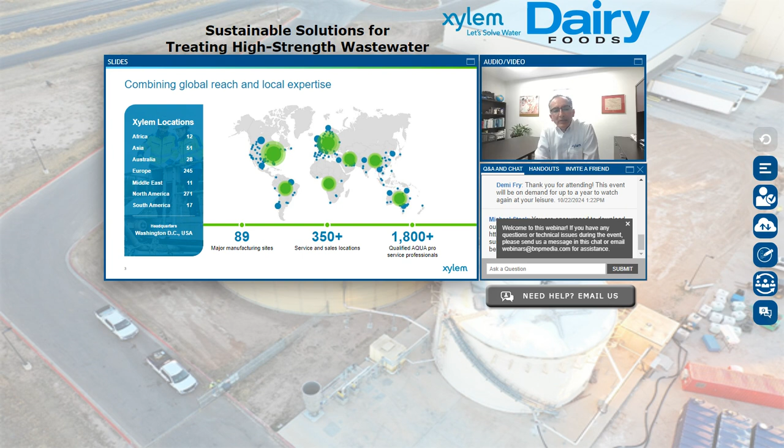As Brian was saying, I'm part of the ADI Systems team, and together with Evoqua Water Technologies, we joined the larger Xylem team about a year and a half ago. Xylem is a worldwide player in the water sector, with coverage worldwide, as you can see with the dots on the map. My work over the years has involved a lot of treatment systems in North America, but it has also taken me to international projects. Wherever there is industrial wastewater that needs to be treated, I'd be happy to look at it, and sometimes I get to go to some interesting countries and sites.

I am proud to say that Xylem places a lot of importance on sustainability, and sustainability has been a big part of what I have done over my career, getting close to 30 years now, but who's counting. Our sustainability involves not just doing our own work more sustainably, but also helping our customers achieve their sustainability objectives.

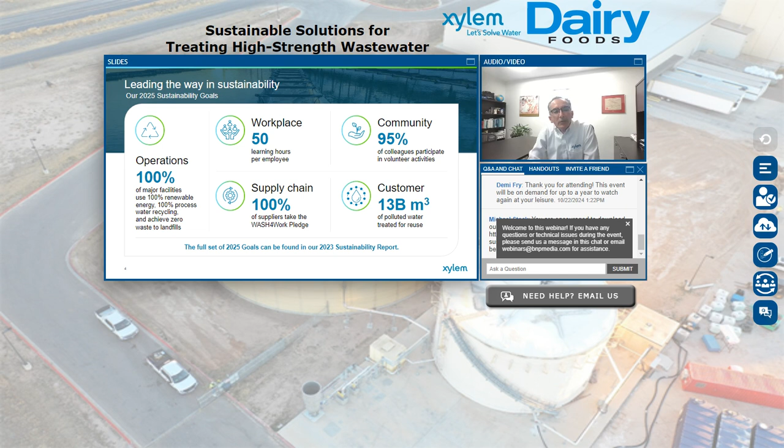But there will always be some waste material. From a sustainability point of view, how do you recover that value, or how do you reduce your waste? And of course, how do you improve your sustainability score out of your overall production process?

So, as you know, there's growing demand for dairy products. We're talking about an industry that could be in the 600 or 650 billion dollars per year worldwide. That has to do with demand for milk and milk products, and also a growing population and increasing urbanization. People are always demanding better and better products and better nutrition.

So the dairy industry has responded in kind, and we're seeing a trend towards larger production plants. And of course, as you do that, you're always having to look at how do you create those products in the most sustainable way possible.

Okay, so what does the wastewater look like coming out of a dairy plant? What is in that wastewater? As you know, milk comes into the plant, and you're either making fluid milk, you're bottling that milk, but you're cleaning the equipment that you use to do that bottling.

But as you get into more of a value-added product, whether it's cheese or yogurt, ice cream, or butter, you will be handling that product that came in, doing something to it, and then trying to get as much of that original milk that came into the plant into a final product. There will always be some losses, and those will end up in your wastewater. In some cases, there will also be bottling and packaging losses as well.

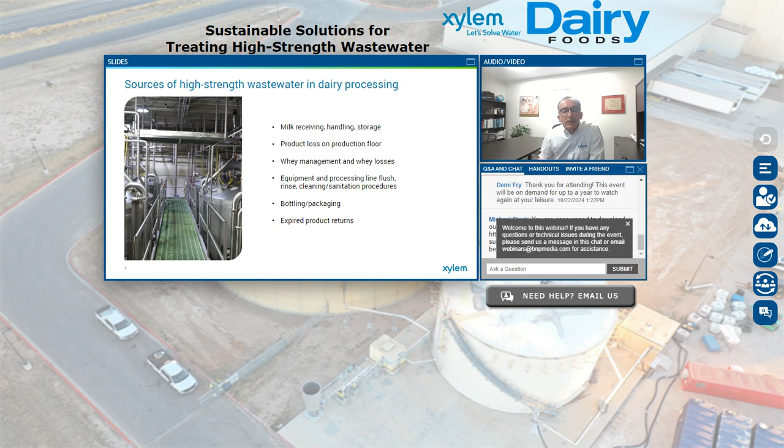Of course, where we come in is when some of those products can no longer be recovered directly for their value. What we're going to try to do is get some value out of the energy that's still left over in that product.

Okay, so this is a typical range of wastewater characteristics that you will see in dairy processing. I would say that this range would be more typical of a cheese processing plant, for example, or a yogurt processing plant. Most medium to large size plants would generate wastewater flows in the 50,000 to 500,000 gallons per day. Or if you prefer metric units, it would be 200 to 2,000 cubic meters per day.

And it's a fairly high organic strength wastewater. So if you're thinking of COD, chemical oxygen demand, if that's the term that you're familiar with, the concentration in COD would be in the 4,000 to 12,000 milligrams per liter. So that's fairly high strength wastewater. And in some cases, if you have a plant that creates a whey stream, you could be talking about CODs in the 50,000 milligrams per liter or more. And proportionately, you will also have a BOD in the 2,500 to 8,000 milligrams per liter range.

Suspended solids, fat, oil, and grease, of course, is something that you need to keep in mind. That FOG comes from milk fat, or it can be from some of the other ingredients that you might be adding to your dairy product in order to make the product that you're trying to sell.

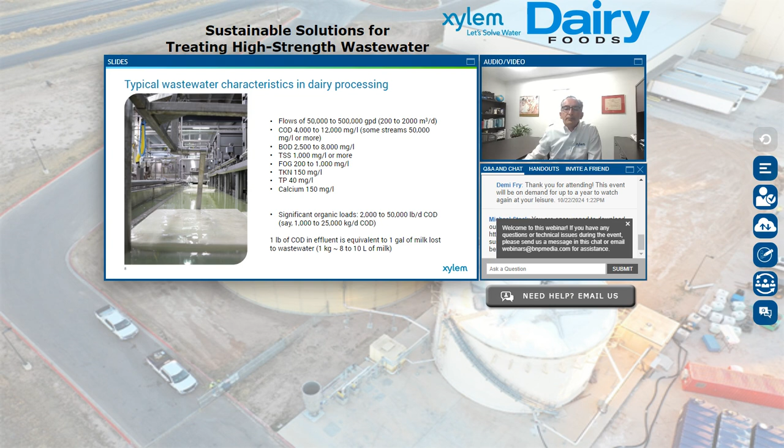So what are the conventional ways or the more traditional ways of handling that dairy processing wastewater? Well, one thing to do is to do primary treatment. You try to recover suspended solids and the cream in the wastewater. You recover the FOG, you remove it. And then usually where that wastewater goes is into an aerobic activated sludge process. So that removes the BOD, the nitrogen, the phosphorus.

But these treatment methods require a lot of energy. There's an energy input to treating wastewater aerobically. And you're also generating quite a bit of waste sludge. And so that sludge has to be handled, has to be dewatered maybe, and it has to be trucked away and disposed of safely. So that represents a high cost to the operation. And of course, that's a little bit less sustainable in the long term for the plant.

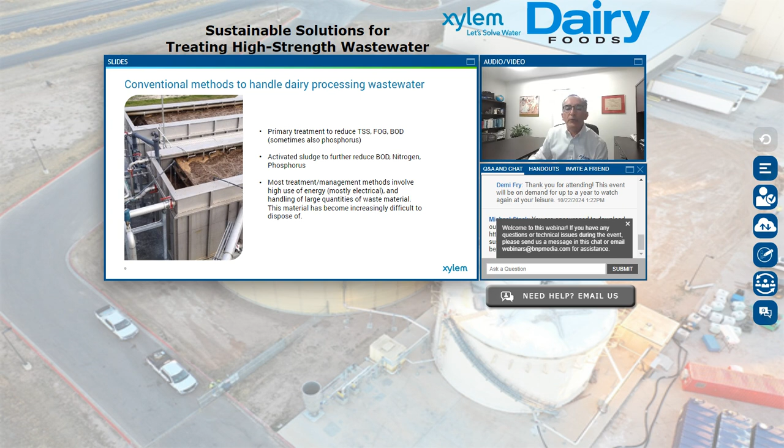So as I made the pitch earlier, we're trying to help you folks meet your sustainability goals. And one way to achieve that is to try to recover the food that's still in the wastewater. Perhaps you can add some dissolved air, and the little bubbles of air in a dissolved air flotation system will bring up those solids to the top. It will bring up the fat, oil, and grease, bring them to the top, and maybe you are able to sell that material and use it as cattle feed.

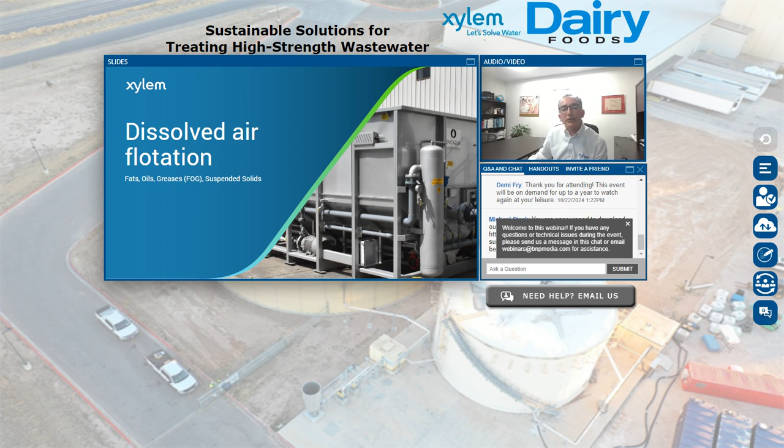So that's one way of trying to achieve that objective of reducing what goes out to the environment or what goes down to the city for the city to treat. There's some points here about when to use it, when not to use it, advantages and disadvantages of using dissolved air flotation for treating your wastewater.

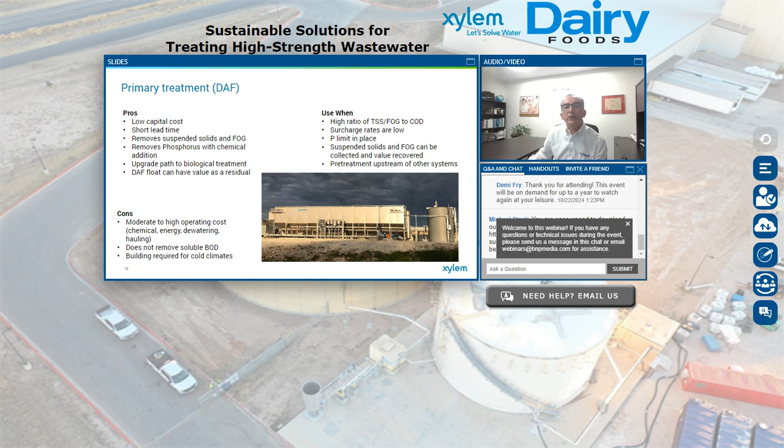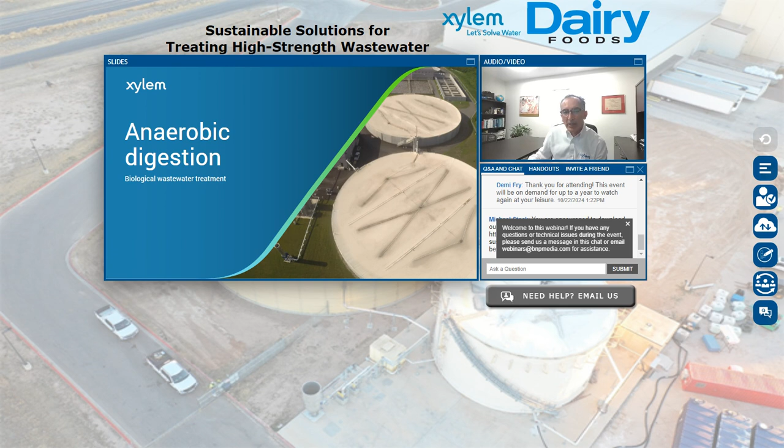Now, where I get more excited is when you're able to take that high strength material, all that water with a lot of organics in it, a lot of calories still left in that waste stream. Why don't we, rather than discharging it into the environment, put that material into an anaerobic digester? So in an anaerobic digester, we have specialized bacteria that are able to convert the energy, those calories that are still left in the wastewater, into biogas without the need for a high energy input, the need for electrical usage for that treatment. And as the bacteria convert that organic matter into methane and biogas, this can become a source of energy back to production.

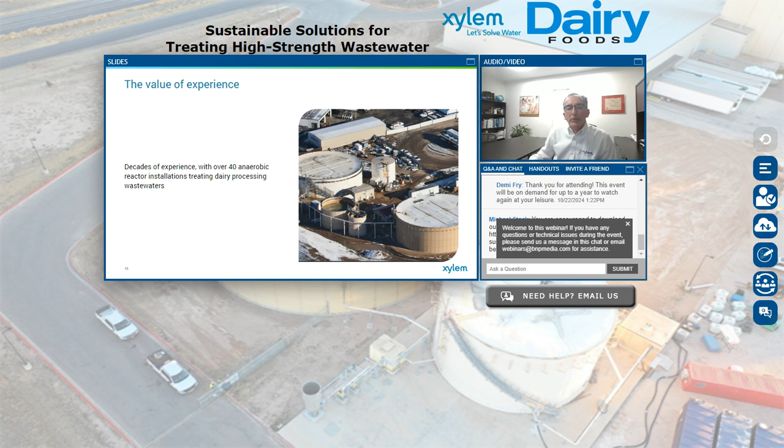So again, all that high strength wastewater that you were not able to recover or that you were not able to turn into a final product that can be sold at a supermarket, the next best thing to do with it is to turn it into that valuable biogas. Of course, there's a value to experience. So our team has been building these anaerobic reactors for perhaps 40 years. And over the years, we've improved on how to design, how to build those reactors in order to squeeze the most energy out of that waste stream as possible.

And the larger the load, the higher the concentration of waste material in your waste stream, the more it makes sense for you to look at anaerobic treatment as a way to handle that waste stream. The biogas will be generated. It's a combination of methane, but also CO2 and traces of hydrogen sulfide. So what we're interested in as a source of renewable energy is that methane, that CH4 that comes in the biogas.

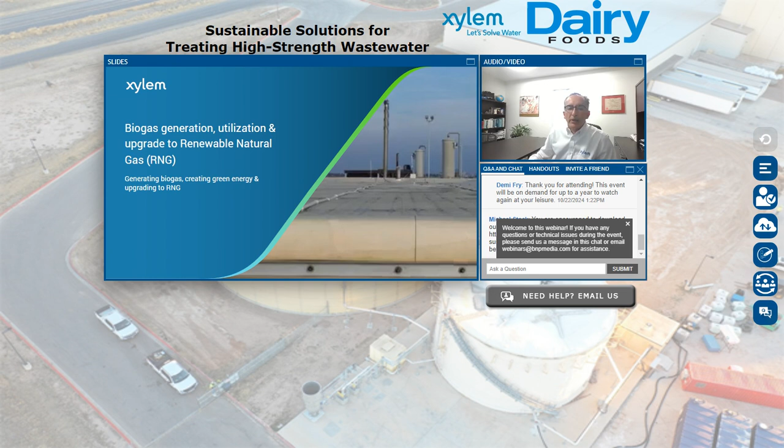Here's a picture of a system where we actually do that. So every pound of COD that you have treated anaerobically and converted to methane will turn to about 5.6 cubic feet of methane. In metric units, 1 kilogram of COD will give you about 0.35 cubic meters of methane that's generated. That is a source of energy. The methane in that biogas has the same heat value as natural gas. So in a lot of cases, we are able to substitute biogas instead of natural gas in something like a process boiler or dryers, or even in electrical generation.

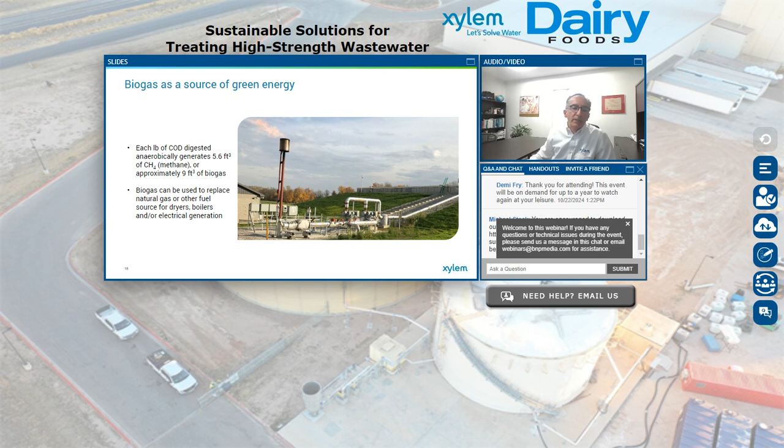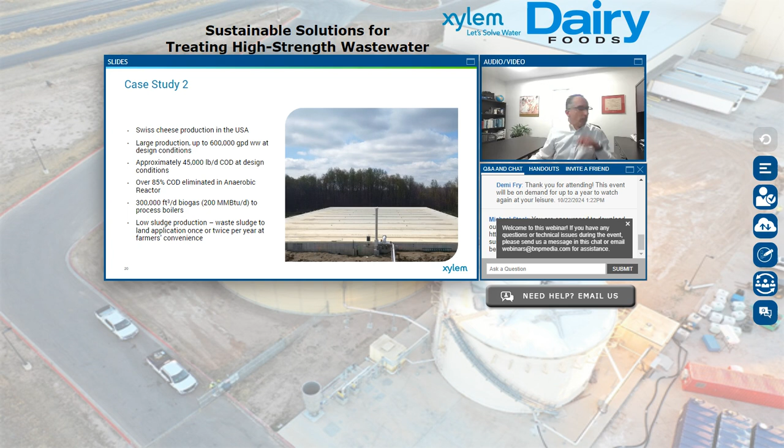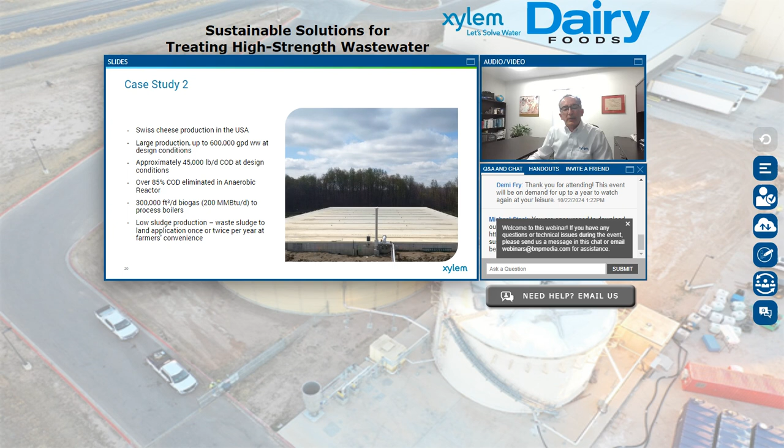Excuse me. The case study a little closer to home. There's a large cheese plant in the Midwest United States. Again, very large load. We're removing roughly 85% of the organic matter in the wastewater, and that biogas as well is being utilized in process boilers in order to reduce the natural gas consumption at the cheese plant.

For very large systems, what we like to do when the economics are in our favor is we purify the biogas. We remove the CO2 and hydrogen sulfide and other impurities, and we are able to put that biogas into a pipeline. So there are a lot of incentives right now to be able to do that. So for the large system, that will have a very large return on investment when you're able to do that.

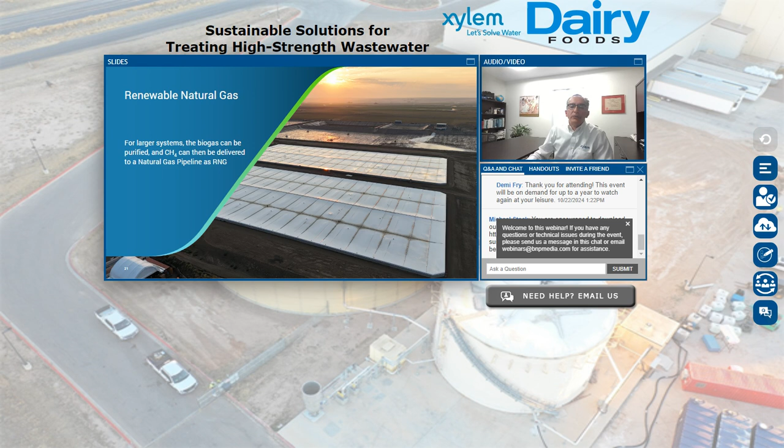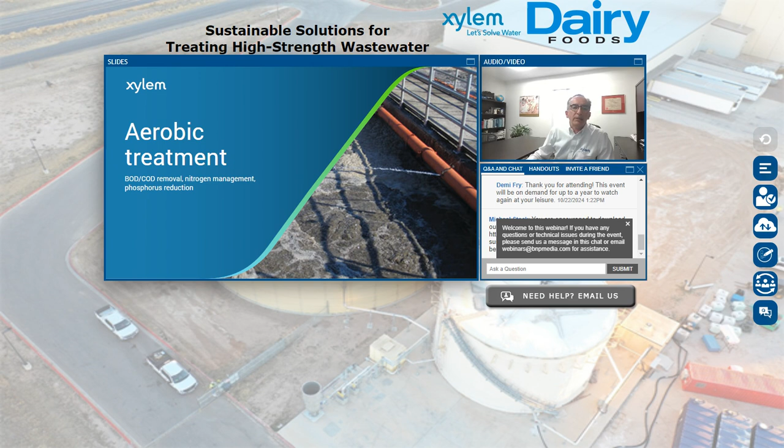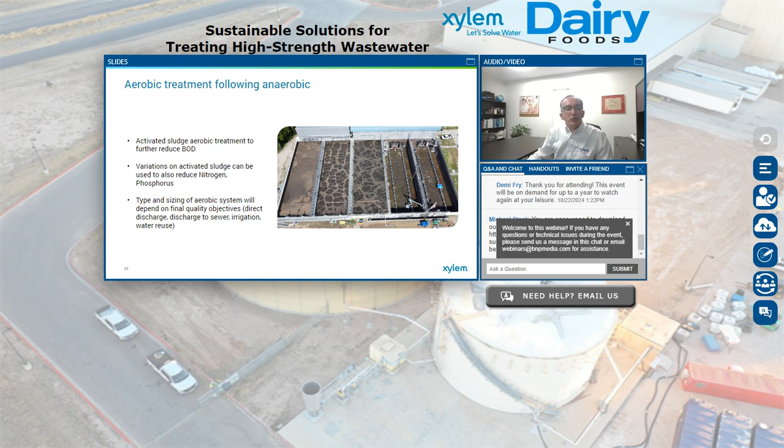Of course, you've taken the energy out of that wastewater, but you can't ignore that there's still a lot of liquid that you need to dispose of. So depending on what objectives you have for discharging that treated wastewater, we can talk about an activated sludge system and aerobic treatment system that can then address the nitrogen, the phosphorus, and maybe BOD and TSS objectives that you need for final disposal of that treated wastewater.

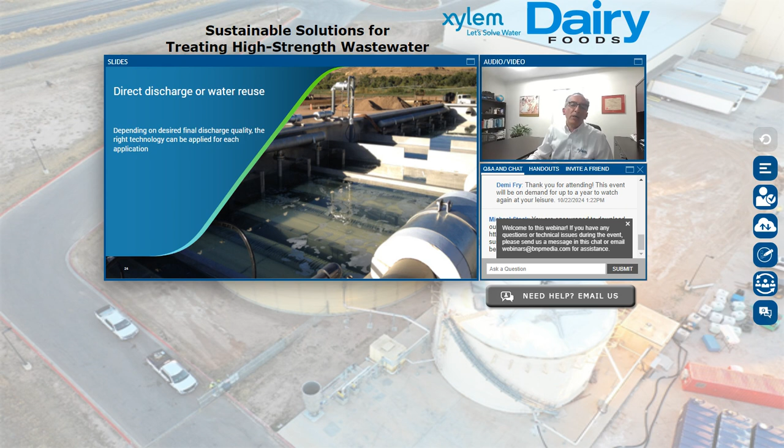In some cases, you might be looking to direct discharge that treated wastewater into a river, so you need a higher quality, or you might be looking to use it as irrigation water. So again, different objectives, different quality that you desire will dictate what kind of treatment system you will have for treating that final effluent.

In cases where water is more valuable, for example, the Southwest United States, where you have water scarcity, we will also look from a sustainability point of view. We might want to look at reverse osmosis or other membrane treatment technologies to get you even higher quality water that you can then use as boiler makeup water or maybe cooling tower water, further achieving your sustainability objectives and overall production for your plant.

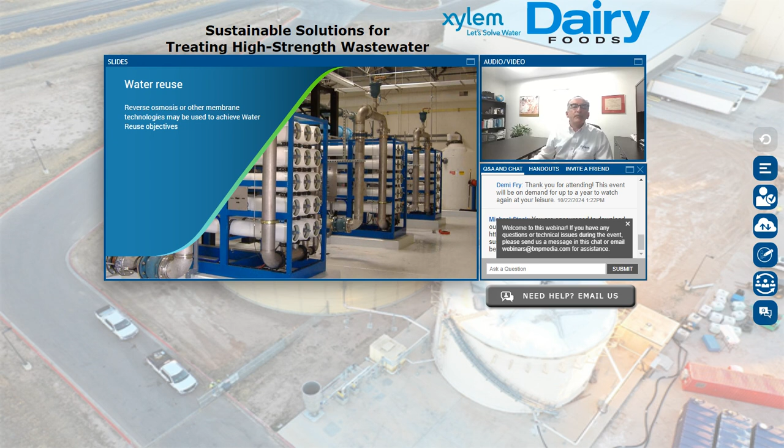So this is a very brief introduction to some options that you might want to look at for handling those high strength waste streams. I'd be happy to look at a specific opportunity that you might be looking into, and we can get you conceptual solutions that might address your concerns. I'd be happy to answer some questions right off the bat. Thank you very much.